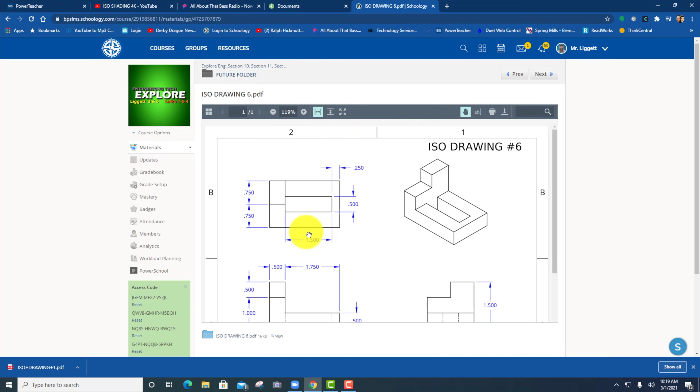All right, so we're ready to draw number 6, isometric drawing. I'm going to click on the PDF for drawing number 6, go to the magnifying glass, and click Fit to Height.

In this one, we have a couple of things happening. We have a hole here and a corner missing here. All of these can be done in 2 extrusions, but for this one it's easier to do in 3 extrusions. So I'm planning on drawing this L shape for the front view and then removing this hole and removing this corner in 2 separate extrusions.

This hole height is 1.5, this is 2.25 long, and they're both a 1/2 inch thick. So let's go ahead and start drawing that.

I'm going to create a new document. This is ISO 6. Click OK. I'm going to go up to the 3 lines and change the workspace units to inches and hit the check mark.

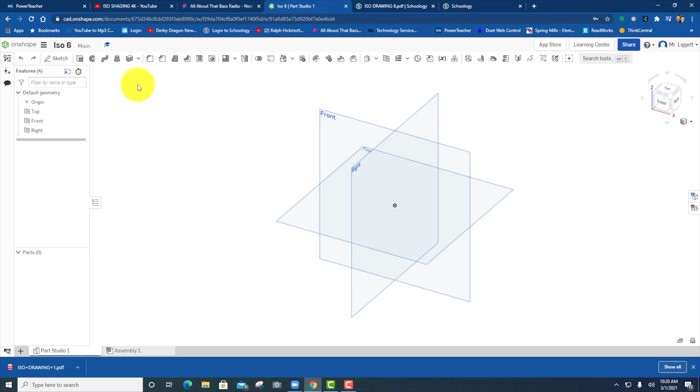I'm going to click on sketch and the front view work plane, and then choose the front of the view cube, so I'm looking straight at it.

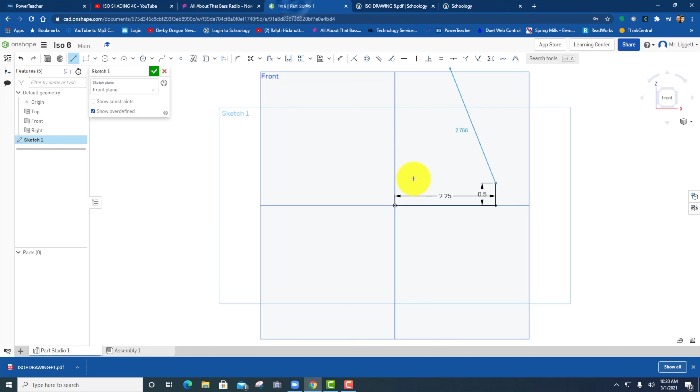I'm going to draw over, this is 2.25. I'm going to go up 0.5, over, this distance is 1.75, then 1.75 again, I'm going to go up this distance, which is 1.5 minus 1/2, which would be 1.

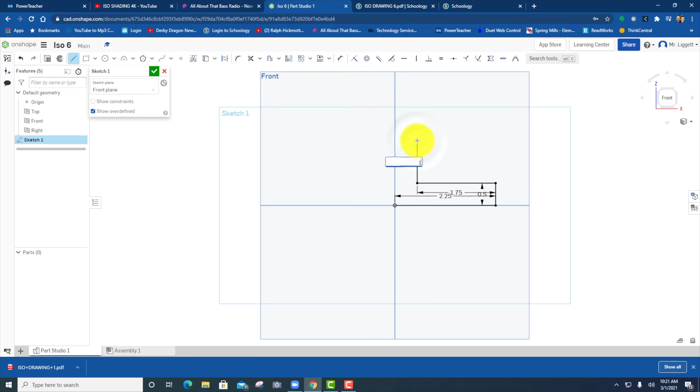I'm going to come back to this line and it'll snap back to the origin. So that is the L shape, and that makes up everything we see in this view, the outside shape.

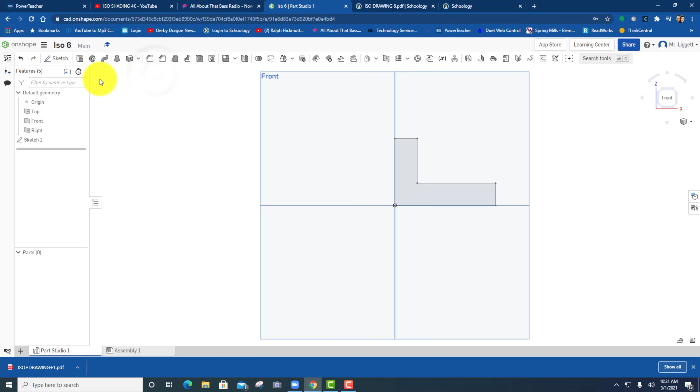So now I'm going to hit the check mark and go to extrude this. I want to be able to see this, so I'm going to use my view cube to see how thick this is, and I want this to be 1.5 wide, so I'm going to change this to 1.5.

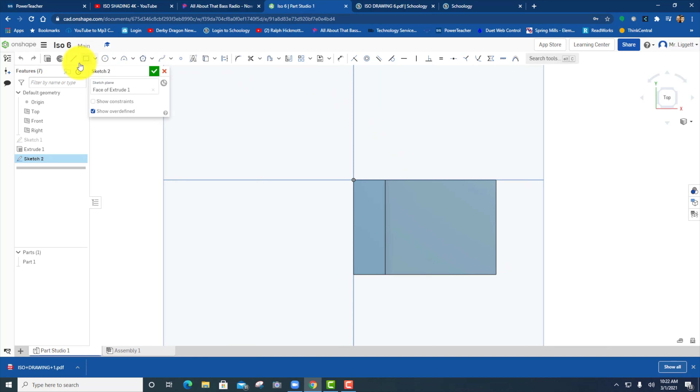Hit check mark. Now I need to remove the corner here and the hole here, so let's start with this. We're going to right click, new sketch, and in my top view I'm going to draw a rectangle. Now this rectangle is not going to be in the right spot. This right here will be 1.5 by 0.5. So I'm going to type in 1.5 and 0.5, but you can see it's not centered properly.

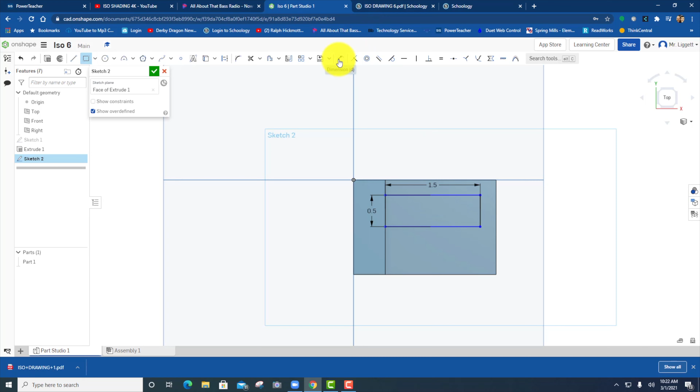So I need to add an extra dimension from the edge of this to the edge of this, and this right here will be 0.5. So that looks pretty good.

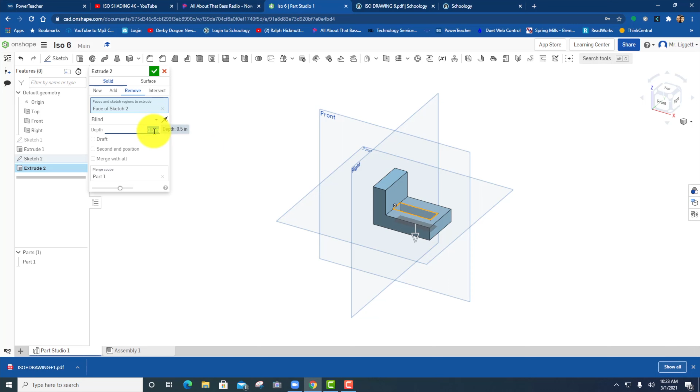So we're going to hit the check mark, go back into our 3D view, so I'm seeing the front, right, and top. Hit extrude this shape right there, and we want to remove, and this is 0.5. Hit check mark, and now you can see there is the hole there.

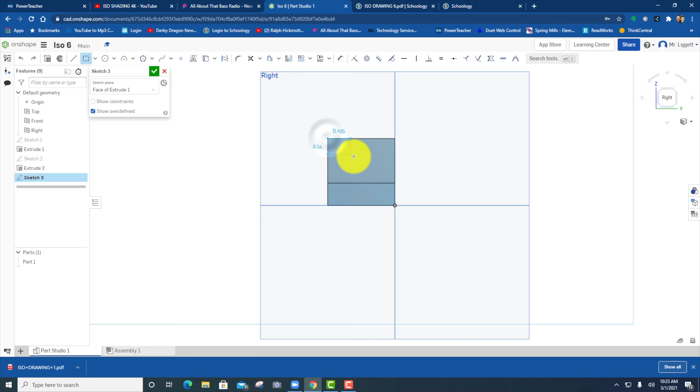So the last step we need to do is remove that corner. So I'm going to click on this face and create a new sketch. I'm going to draw a rectangle from this corner over, and this is going to be 0.75 by 0.5, just like that.

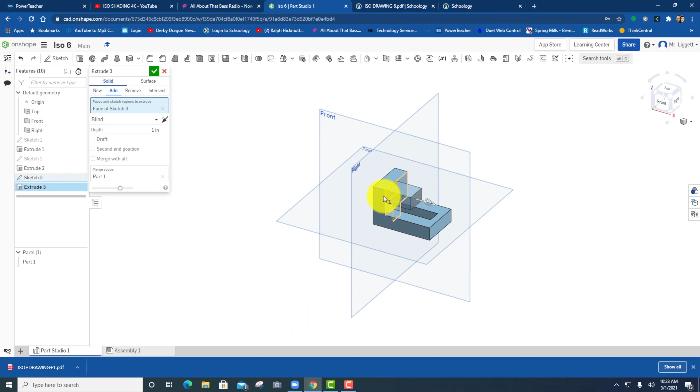And I'm going to hit the check mark, extrude this shape. Let's make it so we can see this properly. We want to remove, and this is the distance of 0.5. That looks good, so I'm going to hit the check mark. And number 6 is finished.

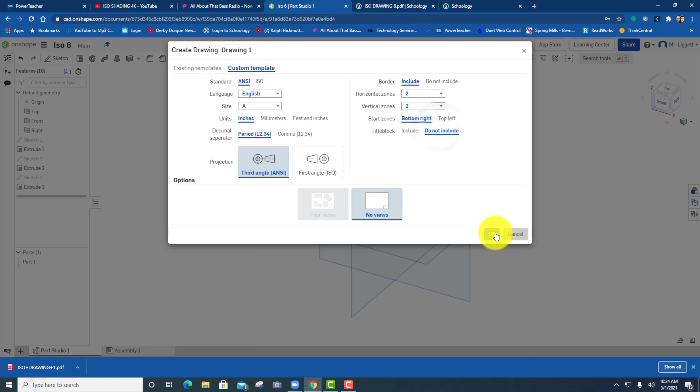So I'm going to go to the plus sign, create drawing, custom template, do not include title block, hit OK. Going to go to part 1. I'm going to click A2. Then I'm going to click right side view in A1.

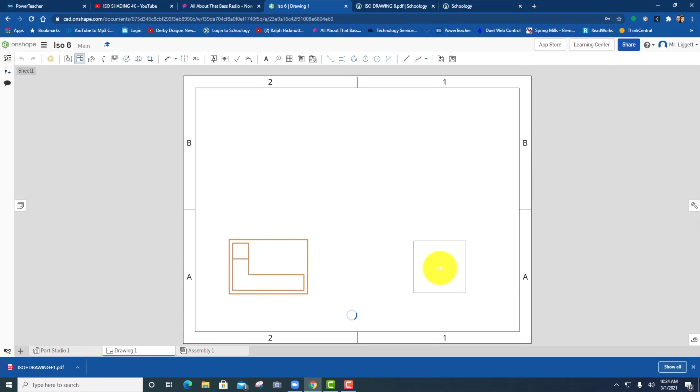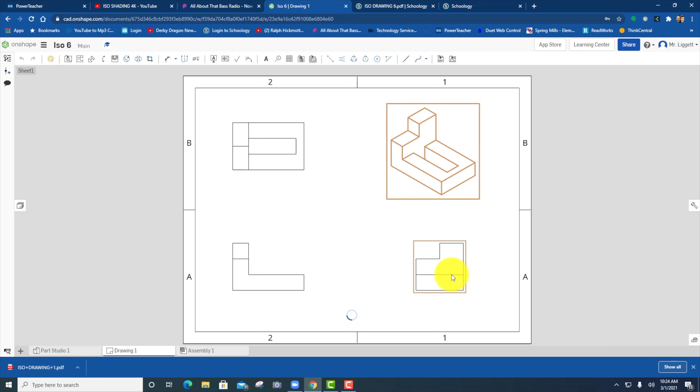Then I'm going to click the front view to the top view and front view to the isometric view in B1. I'm going to hit escape, right click, show shaded view, and then in my other views I want to show hidden lines.

All right, we just need to add a note for our name. Stretch this out a little. Type all caps, your name. Hit the check mark. And your isometric drawing number 6 is finished.